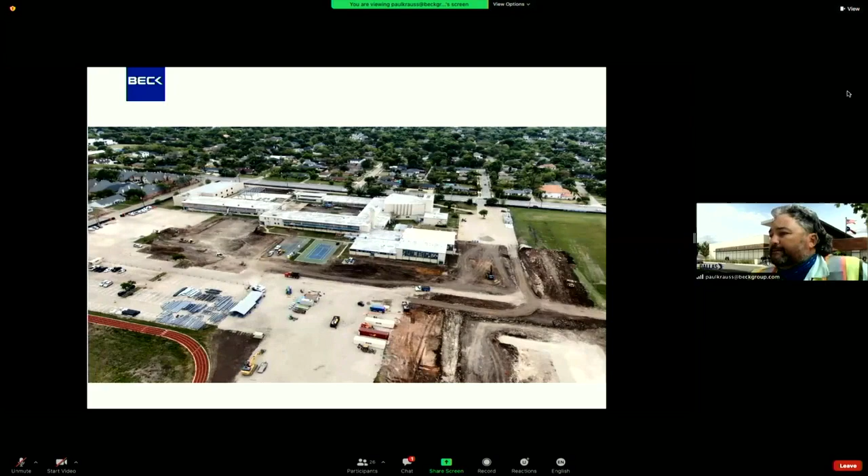We will be utilizing the existing parking lot. Right now we have some steel sitting in it from the previous construction before the tornado hit, but we'll be using that parking lot as an employee lot for all the workers on the job site to try to keep them from parking in the neighboring streets.

In the middle of the screen now, you'll see there's two yellow pieces of equipment. That's where the new cafeteria and student dining area is going. We're currently getting that pad prepped and ready to go.

In the middle of the screen you see there's a bare concrete pad with a little bit of steel. That was some of the construction started before the tornado, so we'll be picking up there in the coming months to continue and get that finished.

In the middle there, in between the courtyard area, that's the new library that will be going in. That pad's ready to go.

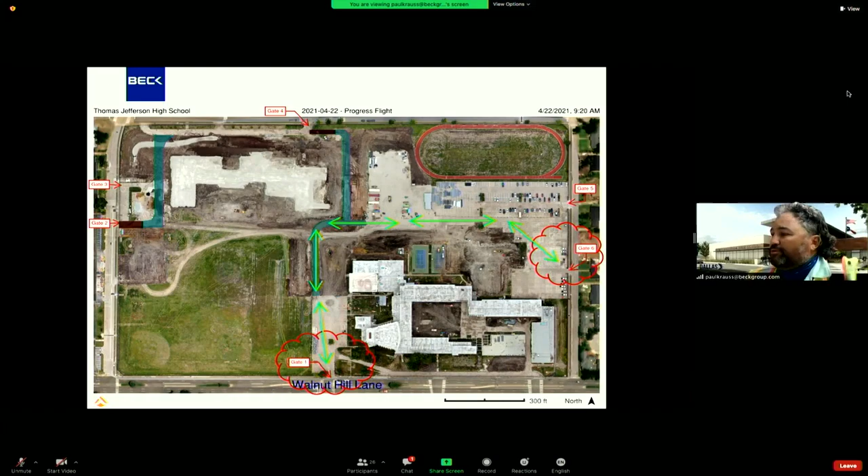I know this isn't ideal, but we're looking to utilize gate 1 and gate 6. Gate 1 is on Walnut Hill Lane and gate 6 is on Gooding Drive for right now. Some of the reasons why we need to use that routing for our trucks and deliveries is because we have a big detention system going in, which is going to go underneath the soccer field that will eventually be installed over by gate 2.

We also have a bunch of utilities that need to go in around the site. Until we get the majority of these utilities in, we have a temp road phase 2 that will be going in. Once we get all our utilities in, we will be looking to change over and utilize gate 1 and gate 2, which would be on Hedgeway.

So then traffic would slow a little bit on Gooding. Now I can't promise you that we won't be driving on all 4 streets around the neighborhood. At times we will need to use gate 3 and gate 4, but we will be trying to limit the use on those. They won't be open every day.

It'll depend on if we have a concrete pour or a different delivery, or if we need to shut down another gate. But primarily we are looking to use gate 1 and 6, I would say, till the end of this year. Then for next year, we should be able to use gate 1 and gate 2 as we continue construction.

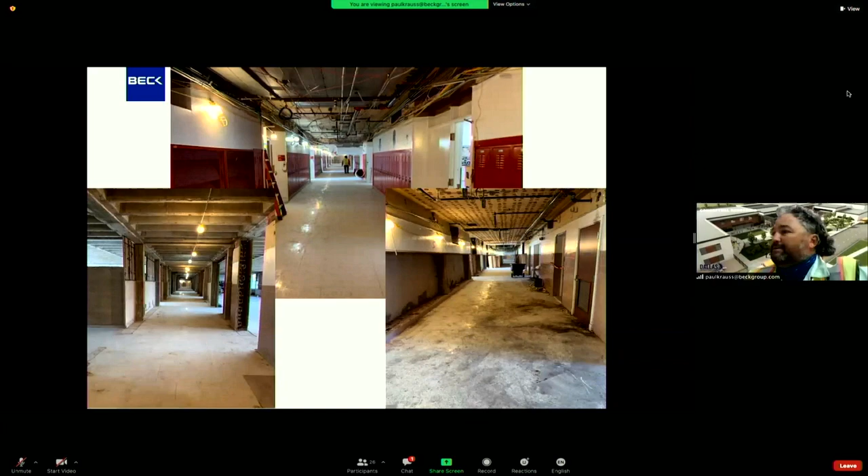Here's a quick look at what we've been working on inside the building. So demo, this is on level 2 of the existing building. We've been going through, removing the lockers, ceilings, and floorings coming out. Here's some of the old classrooms. A few of the walls are getting demolished.

On the outside, all the windows are coming out. So we've been working on removing the windows and installing temporary windows on the existing building.

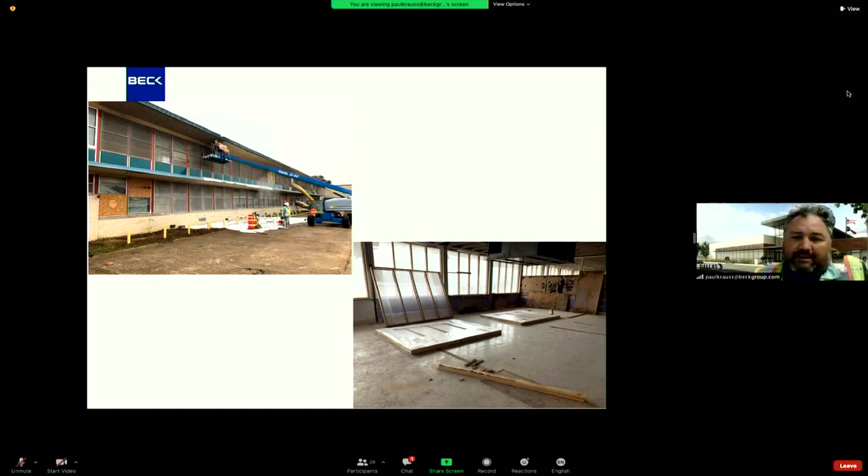I'll talk quickly about some of the upcoming schedule work we have. Over the next couple months, we're looking at finishing up our public work on Hedgeway, Killian, and Gooding Drives. We're hoping by the end of June, but that's depending on the city inspections and schedule.

We had a little bit of a wait trying to get the valve crew out. For those of you affected by the water, thank you for your patience there. We'll be at the city's mercy depending on whether we can finish by the end of June. We plan on starting work on Walnut Hill late end of May, and we're still hoping to finish that by the end of June as well. So hopefully for summer, there won't be too many disruptions on the streets outside of the job site.

On Walnut Hill International Leadership Academy, over the next couple months we'll be working on foundations, so drilling piers and installing grade beams to get the building up out of the ground. That will require concrete trucks every day, pretty much unless we get a little bit of rain, which hopefully we don't.

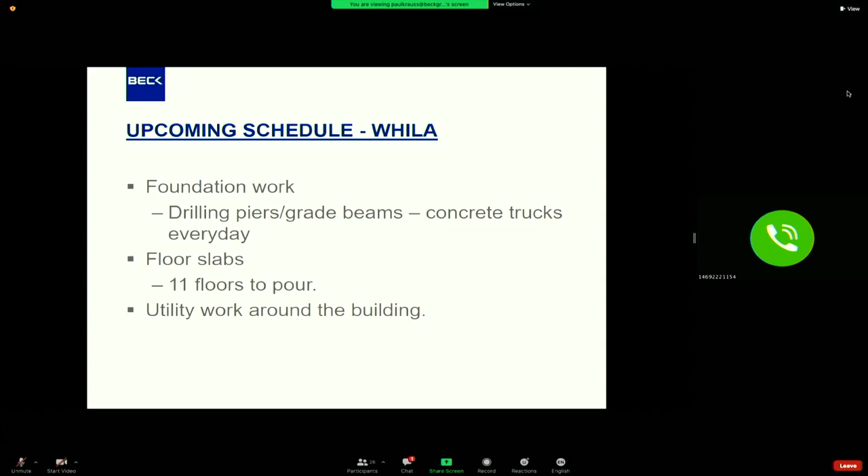We'll also have some floor slabs coming up. We have 11 floor pours to fit in. That'll most likely be towards the middle to end of summer when we start the floor slab work. And then of course we'll be working on the utility work around the buildings, which will be storm drain, sanitary, water, and electric lines.

Upcoming work around TJ High School, foundation work there too. That'll be drilling piers, grade beams, and again concrete trucks pretty much every day. We have some floor slabs to pour there, 12 of those to pour. So that would be, again, middle to late summer when we'll be starting that.

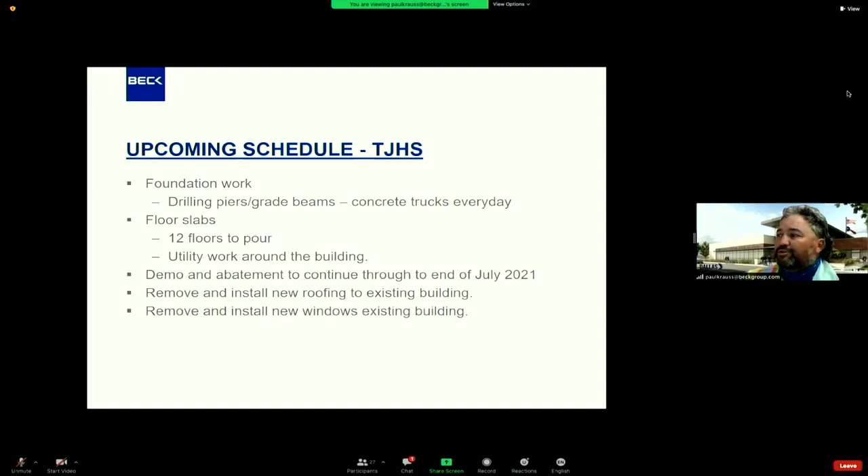We're going to continue on with demo and abatement of the existing structure. We're hoping by the end of July most of the interior is done. We'll have some work on the roof abatement, and we'll be starting to install the new roofing on the existing building, as well as installing some new windows. So that's kind of the activity you'll see over the next couple months.

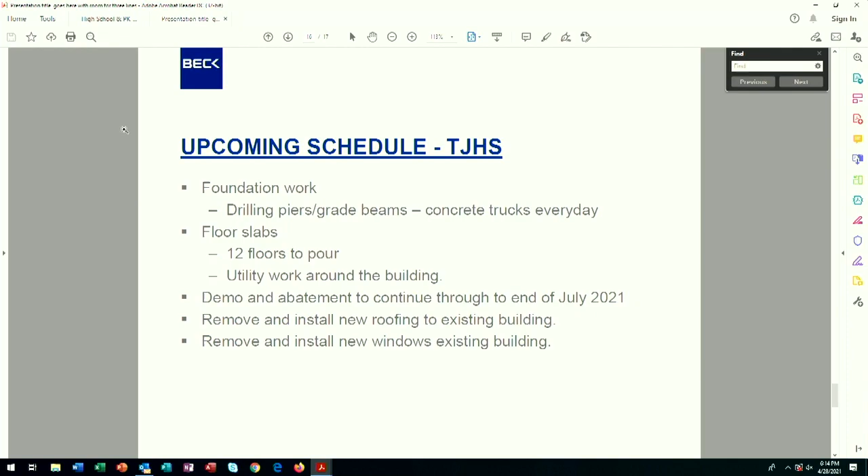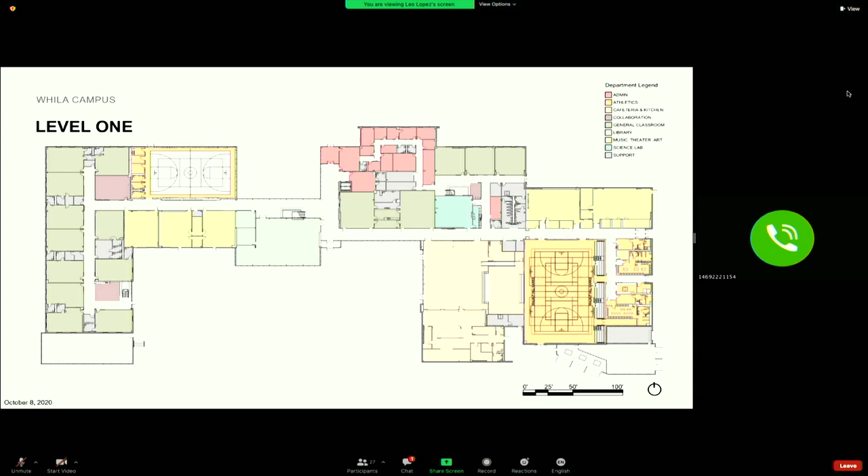Towards the middle, we have our practice gym, which also serves as our storm shelter, and just below that, our art rooms. In the middle of the building, on the south end, in light green, is the library. As you go further east, we have our administrative and business areas and some science labs, special ed. Towards the east end of the screen, we have our competition gym and locker area, and our performing arts as well, which contains dance, theater, band, choir.

One thing that's changed slightly since the last time you might have seen this is that we now have an opening between our competition gym and our cafeteria, so you can have large presentations, serving it as the cafeteria or the gym.

The second floor is very similar. The west side serves elementary students, and as you go further east, you have your science labs, and at the east end, you've got your middle school.

So once again, this school is unique in that it's not just a pre-K school, it's not just an elementary school, it's not just a middle school—it's all of those. So technically, your children could go from pre-K all the way through 12th grade without ever leaving this campus, because they would just move on to Thomas Jefferson.

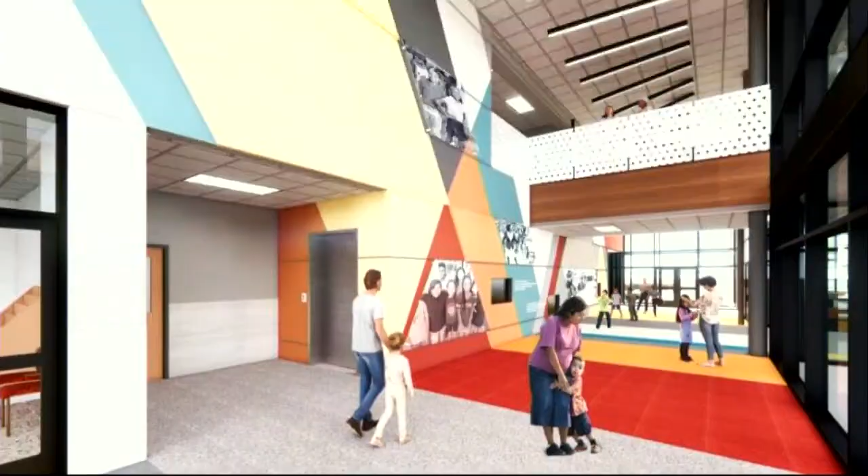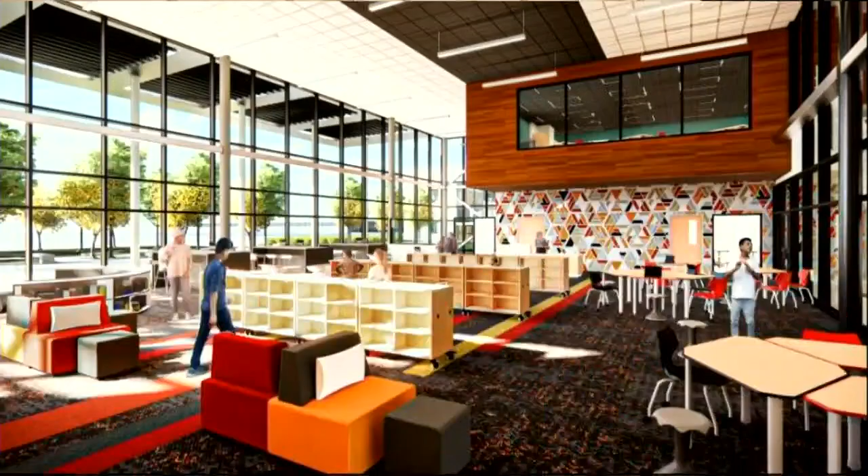Here are some renderings of the school. This is at the main lobby entrance—it's very colorful, very vivid color scheme, very contemporary as well. And here's also a few shots of the library, incorporating some soft wood tones and lots of natural light.

Now we move on to the Thomas Jefferson High School project. That one serves 9th through 12th grade, with roughly 2,200 students and 200 faculty. There's roughly 170,000 square feet of existing building that we're able to keep—again, much of it was demolished in the tornado—and we're adding roughly 150,000 square feet of new addition, for a total of 320,000 square feet.

It's divided into different regions. On the bottom left, we have our fine arts, which is the existing auditorium that we're able to keep, and also your band, modern band, and dance just above that—that's the new addition, sort of hatched in transparent mode. As you go north to the orange area, that's where the old gym used to be, which is now like a wrestling area, and then the new athletics is up at the top of the screen.

That large box at the very top is our main competition gym, which also serves as our storm shelter, and to the left of that is our lockers. As you go east, you'll see our new dining area, which includes not only a kitchen but a culinary center for students to learn culinary skills. We also have CTE, JROTC, and the existing building is pretty much the same.

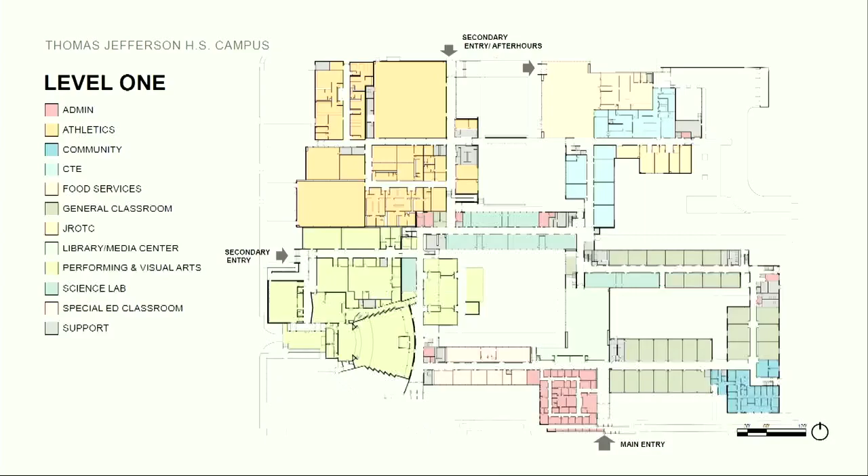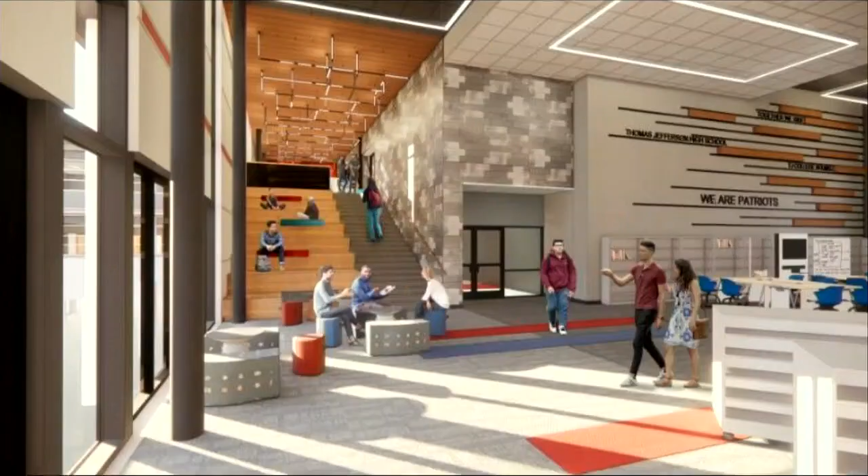I believe this is the library. You'll notice we have a learning stair. We're incorporating a lot of collaborative spaces and 21st century learning in this school, so it's not going to be just your typical old-fashioned classrooms. We're thinking outside the box on this one.

I think that might be the last slide, actually. I'll turn it back over to Joe.

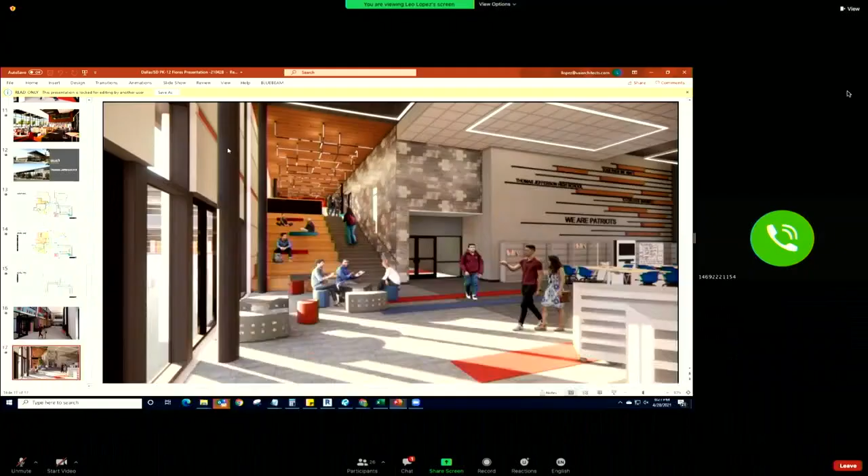All right, thank you, Leo. Can you go back to the overall site plan, please? Sure, no problem.

And one of the people joining us is Mark Colby. He is our landscape architect from Pacheco Koch. Mark, if you want to give us a brief update on the landscaping we're looking at implementing at this site, please. Sure. Hello everybody. As Joe said, my name is Mark Colby, and I'm the senior landscape architect on the project.

We might as well start with the existing site and the existing vegetation out there. We do have to take down some existing trees. Some were damaged in a tornado, and we had a certified arborist come out from our office and take a look at them. He recommended they be removed because they were very close to the south side of Thomas Jefferson High School along the entrance off Walnut Hill, and thought they would probably eventually fail and become a safety hazard. So some of those were removed.

We had to take other trees out that were in conflict with new construction. We did preserve some trees along the face of Thomas Jefferson along Walnut Hill. We also preserved some existing trees along Gooding Drive and Killian Drive. We're also adding approximately 188 new trees back to the site, so we're more than mitigating for the trees we've taken out.

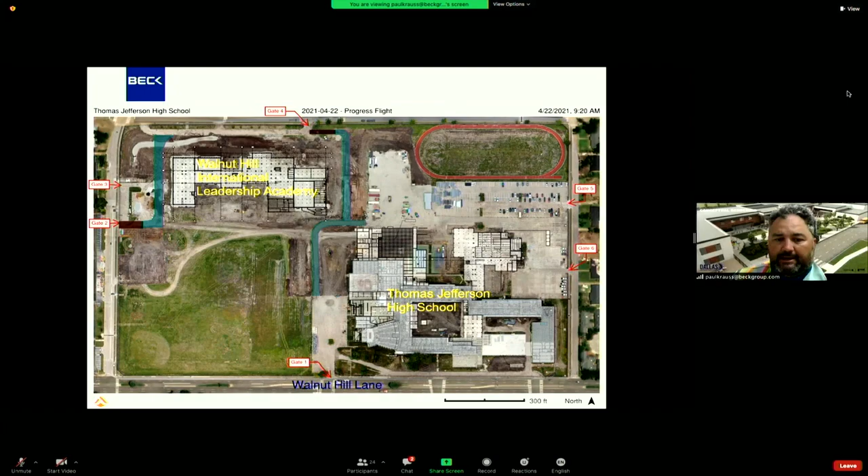And I have a quick drone video to show you. I said before I wouldn't talk all over it, and I won't on this one. I'll just let everyone take this in and point out a few spots as we move around the job.

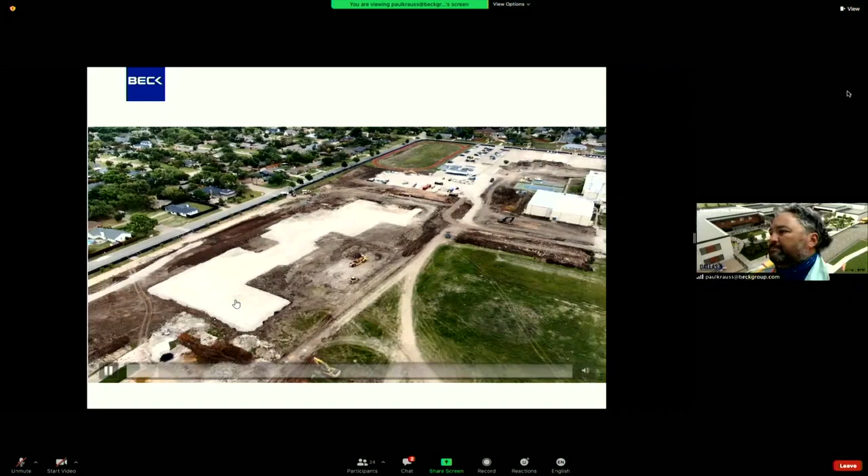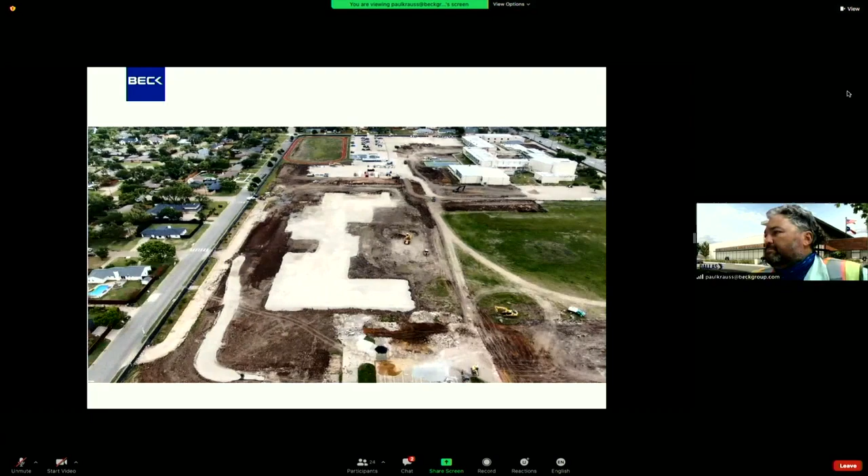So in the middle of the screen is the footprint of the building for the Walnut Hill International Leadership Academy. We're ready to go, just waiting on that permit so we can start drilling piers and get our foundation work going.

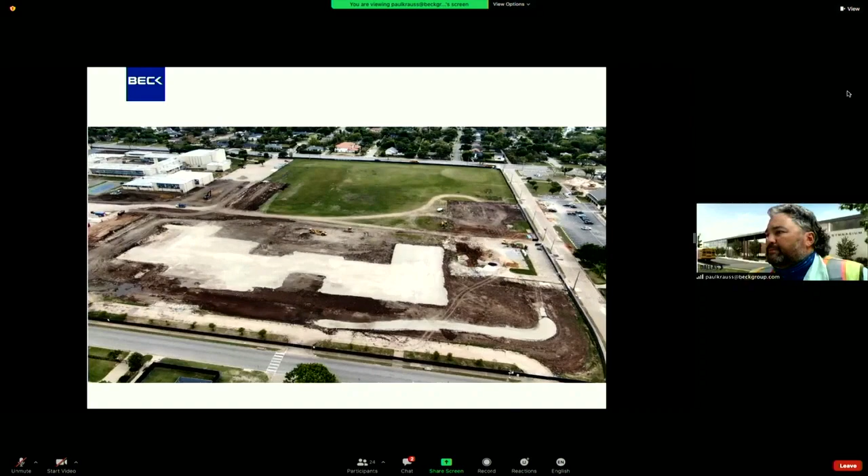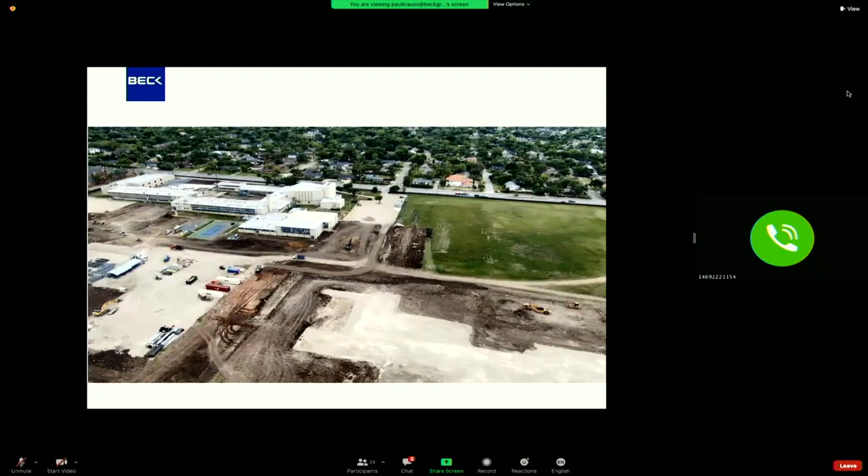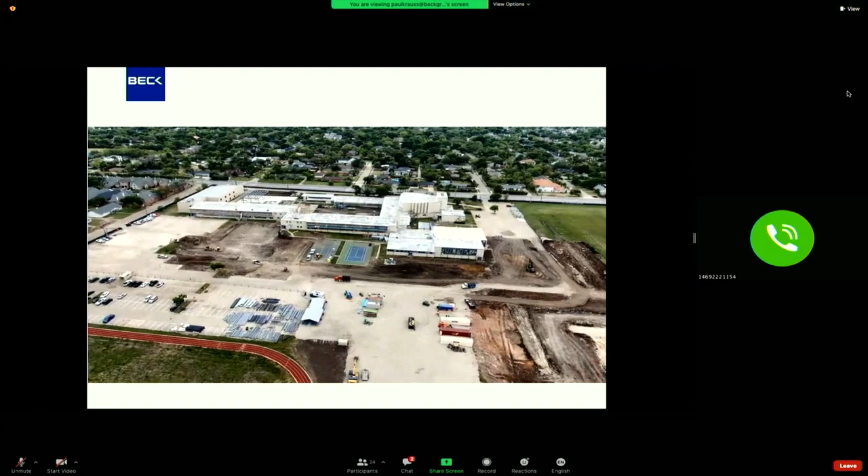There was a question about the detention pond, just to define what it is. Essentially it's basically to collect rainwater and disperse it at a slower pace so that we don't have runoff, and that's what's incorporated into the new design. Actually it's not a detention pond, it's a detention system - isn't that correct, Paul? Where it's underneath the ground, you don't even see it. Correct, yes, it'll be buried and the soccer field will end up over top of it so you won't even know it's there. It's basically a whole lot of pipes underground that will help disperse the rainwater slowly into the city storm.

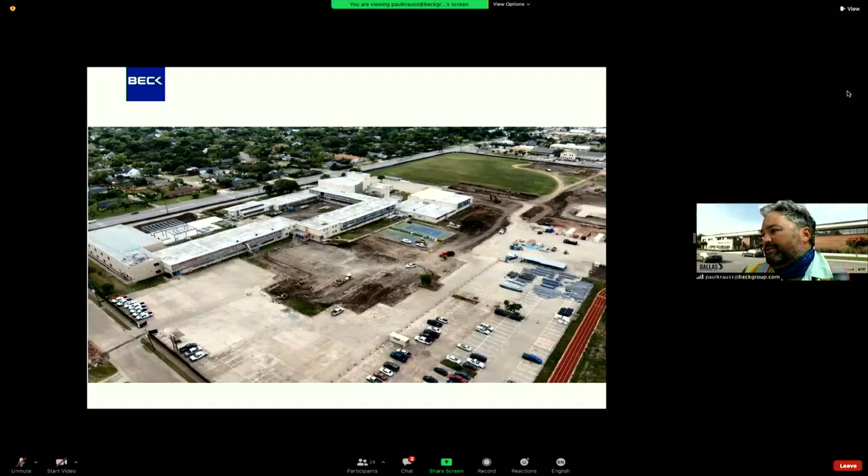So in the middle of the screen, where the two yellow pieces of equipment are, that's where the new cafeteria and student dining is. We're working right now to get that pad ready to go so we can get the foundation work started there in the coming weeks.

So in the middle of the two courtyards, there's the lighter gray or brown-ish color - that's where the new library is going. And then we'll be picking up where the additions had to stop because of the tornado back in 2019, so we'll be picking up and completing that work as well.

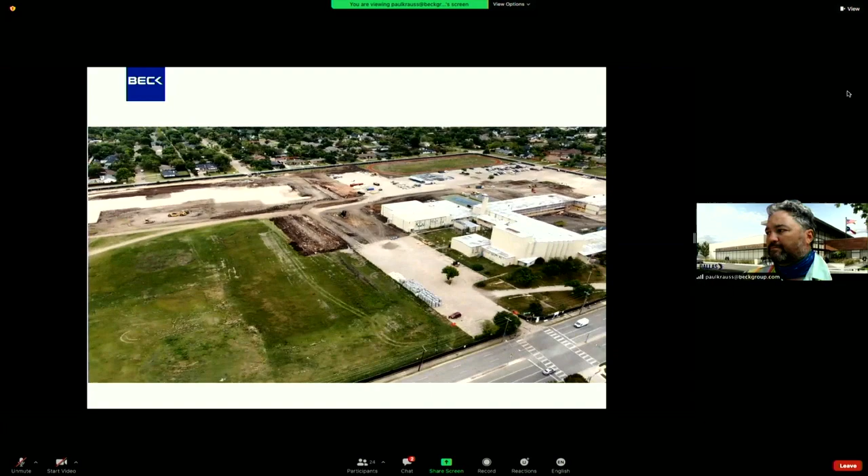I think this is a pretty cool video, just a quick overview. This was shot last Wednesday.

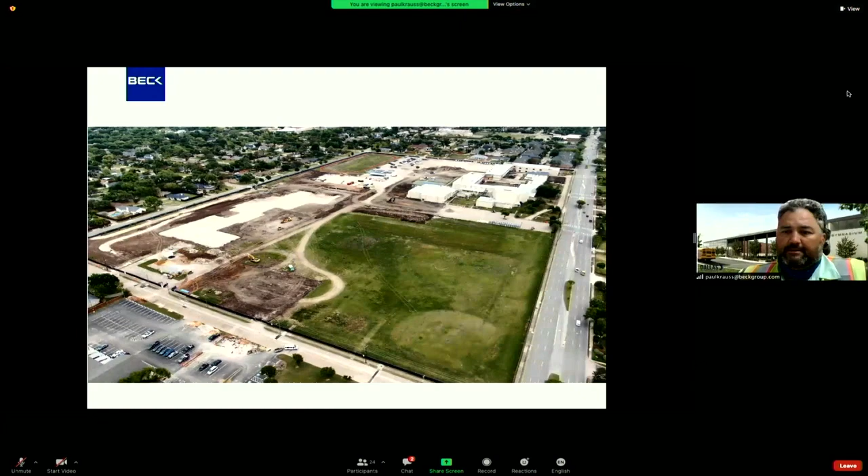So here's a quick overview of how we are setting up our sites. And I think I said before that it's not ideal for the neighborhood that we will be using Gooding Drive, but I'll work through some reasons here over the next couple of slides as to why we need to set the job up this way. So we will primarily be utilizing Gate 1 off of Walnut Hill Lane.

And circling traffic out Gate 6, or we'll be coming in Gate 6 and out Gate 1. From time to time we will be opening up Gate 2, 3, or 4, depending on what we have and what other entrances may be closed, depending on if there's work there.

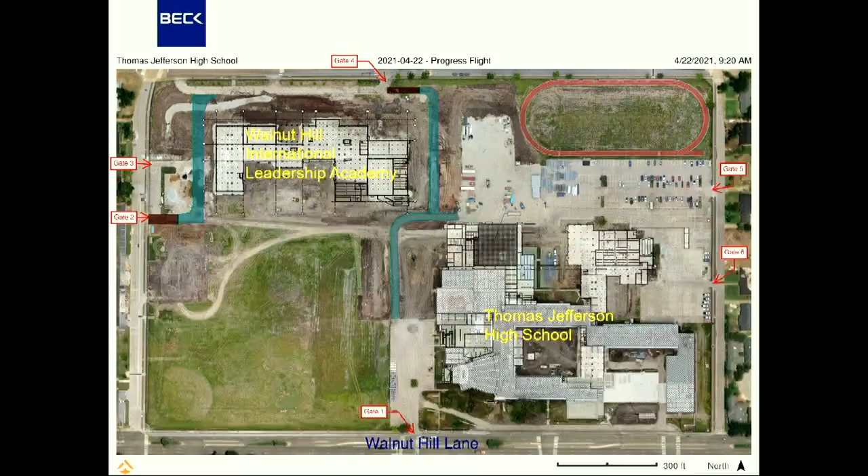A couple of the reasons why we need to use those gates right now is there's the footprint of the detention system, which is a rather large excavation, and it's fairly deep - it's almost 20 feet deep. So by the time we lay that back, it's a very big hole in the ground. Plus we have a lot of utilities that also need to go in around the site.

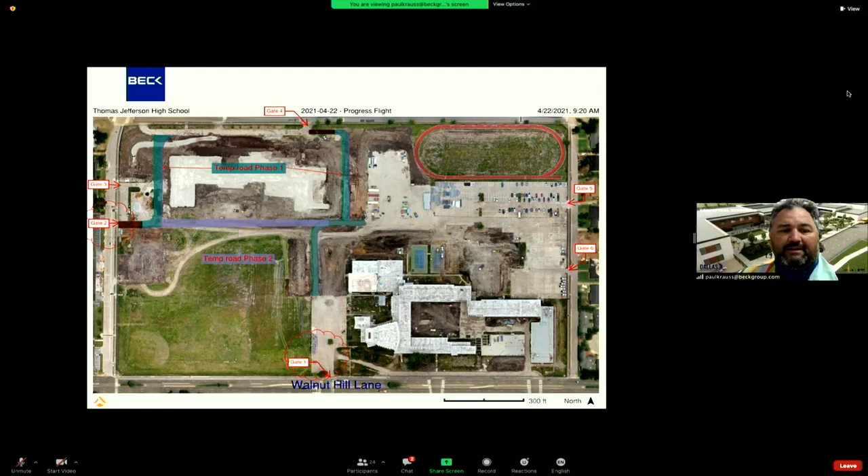So until we get these utilities in, which we are hoping by the end of the year, we would install a second temporary road, which is our phase 2 road. And that would open up Gate 2 for us to be able to come in Gate 1 and out Gate 2, or in Gate 2 and out of Gate 1, which would mean we would limit our traffic on Gooding Drive - we would then only use that as necessary.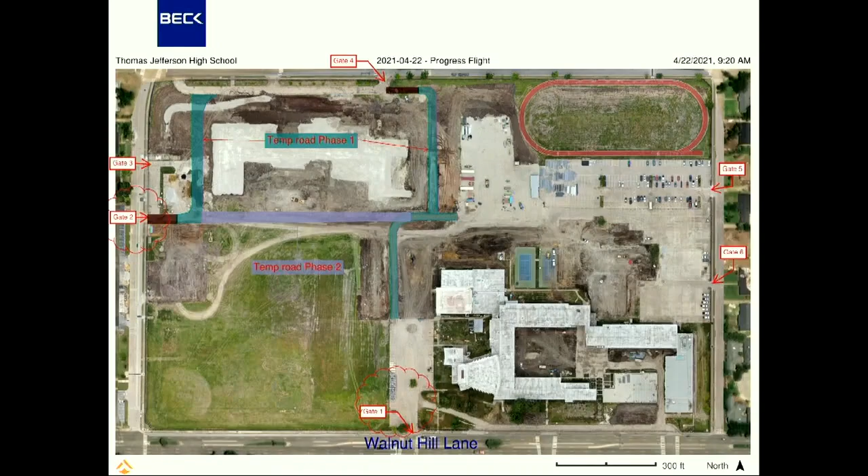Here's a quick look at some of the demolition work that we are doing inside the building. This is on level 2 of the existing building.

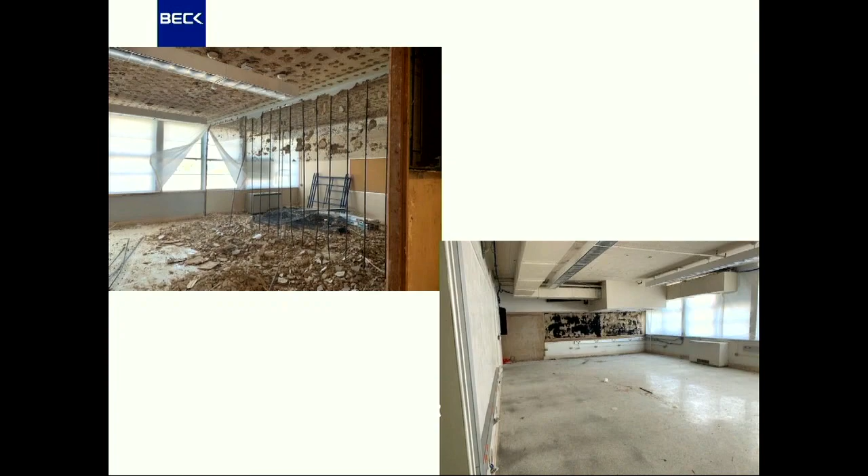Here's some of the classrooms that we've been working through, doing some demolition. On the exterior, we've been removing windows and also installing some temporary windows.

I'll talk briefly about some upcoming schedule work. The public work we're working on right now includes Hedgeway, Killion, and Gooding drives, and we're hoping to finish that up by the end of June this year. We're also looking to start work on Walnut Hill Lane by the end of May, and we want to wrap that up by the end of June too.

But it is pending the city inspections and schedule. Those affected by the water shut off, I know that was delayed a little bit, but that was all in the city's hands. So again, us finishing by the end of June will be dependent upon the city helping us out and getting the inspections complete.

Upcoming work on Walnut Hill International Leadership Academy. Once we get this permit, we'll be going to town on drilling piers and grade beams and getting the building coming up out of the ground. It will mean we'll have concrete trucks every day to pour the piers and the foundations. After that, we'll have some floor slabs. We have 11 pours, or 11 sections of floors, that we need to pour for that building, as well as we'll be installing utility work around the building, which is the storm drains, the sanitary lines, the electric, and the water lines.

The same will be happening on TJ, so foundation work, drilling piers, getting concrete trucks every day, floor slabs. We have 12 pours over at TJ. Utility work will also be going on. We'll also be on the existing building working on demo and abatement. That should be working through the end of July for the interior.

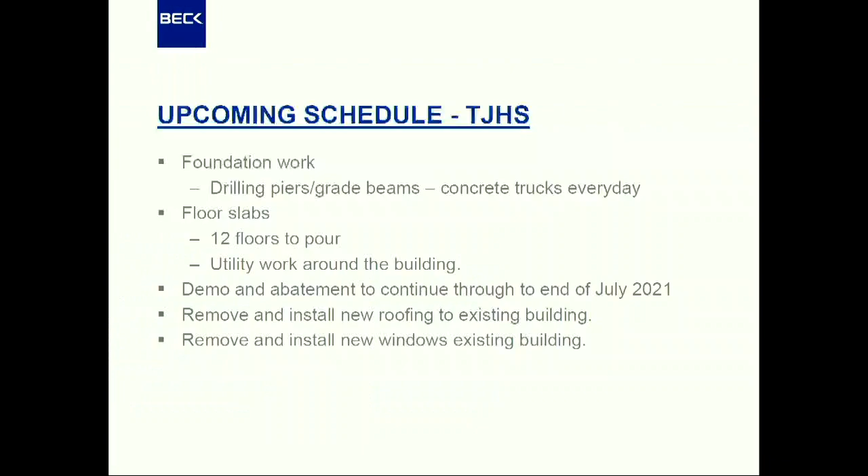Lastly, we want to reiterate what Trustee Flores spoke about earlier. We want to be good neighbors too. We know construction is messy and it's noisy. We want to clean up after ourselves. We have meetings weekly where we talk to all our contractors and reiterate not to drive through the neighborhood. We really don't want delivery trucks going through the neighborhood. We send out logistics plans like we showed you earlier and ask these deliveries to come in gate 1 or out gate 6. But we can't control everybody, so I can't guarantee there won't be a rogue truck that drives through the neighborhood. But we do talk about it weekly with everyone, not just about driving through the neighborhood, but about being good neighbors.

So thank you for having me, and I look forward to sharing some progress with you guys in another couple months.

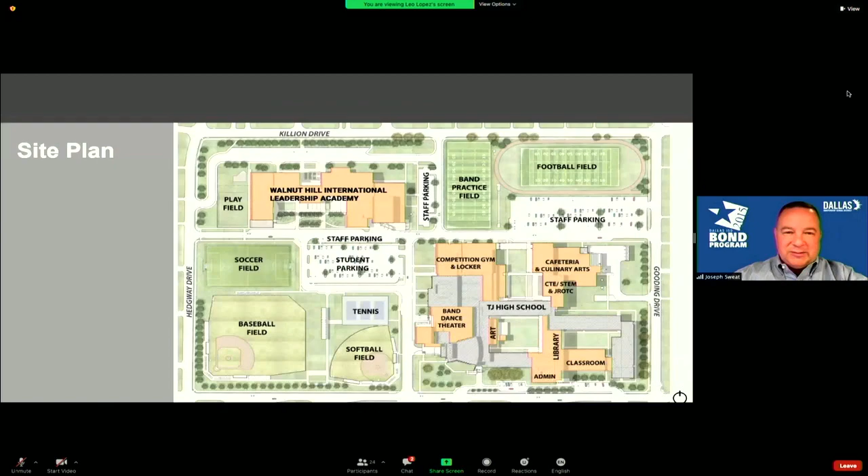Thank you, Paul. Paul failed to mention one of the things they have done while doing utility work out there on Hedgeway and Killion, working around the site, is his team has gone and talked with the neighbors that have been impacted and coordinated with them, or if the house is under construction, coordinated with the contractors there to make sure everything's good, and to be a good neighbor and make sure those people impacted by our utility work are up to date with all the information they need, and we keep them abreast of anything that's happening.

All right, well, I'll go on to the next part. My name is Leo Lopez with VAI. I'm the Senior Project Architect on the Walnut Hill International Leadership Academy, formerly known as Dallas ISD PK8. It serves pre-K through 8th grade.

In the top rendering, you can see the parent drop-off, which is on the north side of the campus. And on the south side of the campus, we have the bus drop-off. You can see there's a lot of enhanced landscaping features. It's a very, very playful, interactive space. And we're also incorporating trellises, just for nice outdoor learning areas.

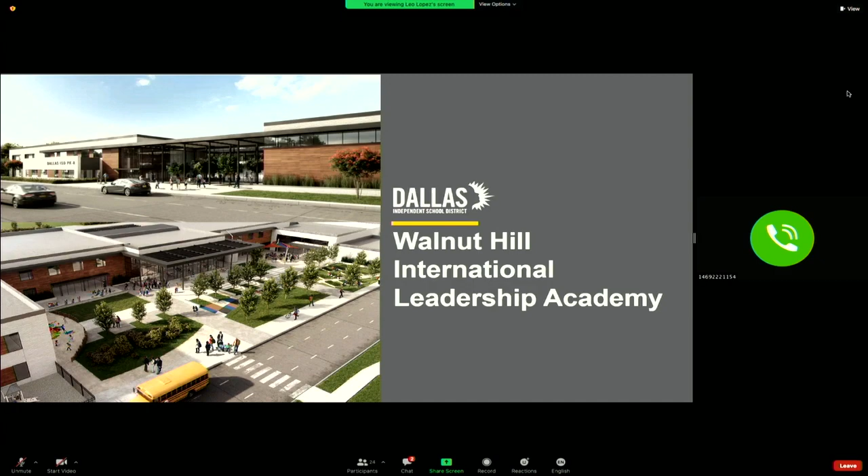The way the school is broken up, we basically have pre-K through elementary typically on the west side of the building, and older students on the east side of the building. More specifically, level 1 west side is pre-K through 1st grade in the dark green color. As you move further east, you see the practice gym, which also serves as the school storm shelter. Just south of that, you see the art rooms. In the middle of the building is the library. There's a lot of natural light coming through that. It's surrounded by glass on all sides.

And then the pink area, the top middle, is the administrative area, the main entrance, the offices, and so forth. Just south of that, we have special ed, followed by a middle school science lab, the 6th grade classrooms. And then the east side of the building is primarily performing arts and athletics.

So the two light green areas at the top northeast corner are band hall, dance, theater, choir, some of them spaces combined. Just south of that, we have a competition gym. And just west of that is our dining area, the cafeteria.

For those of you who might have attended last time, you'll notice some steps showing up on that stage on both sides. That's because now we're going to open up the stage to either side, so you can give smaller presentations in the cafeteria and larger presentations or plays, things like that, to the gym.

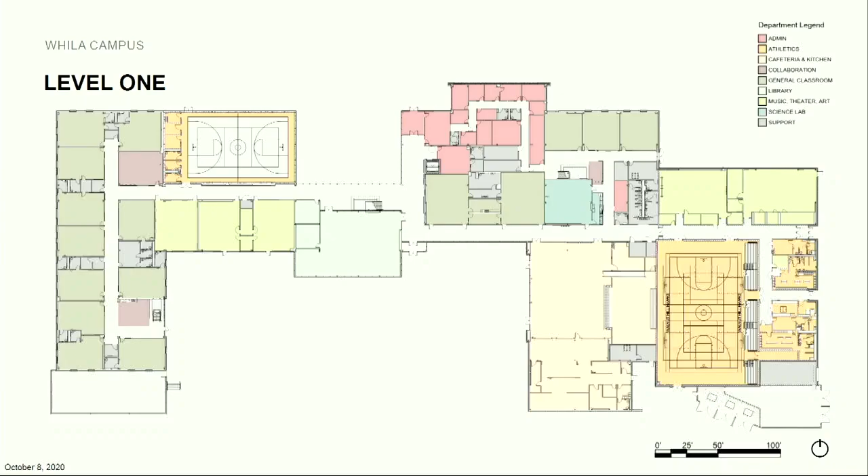On the second floor, it's still a carryover from the first floor. The second floor west is primarily the rest of your elementary school, so second grade through fifth grade, followed by additional art classrooms and science. In the middle of the building is primarily your sixth, seventh, and eighth grade classrooms.

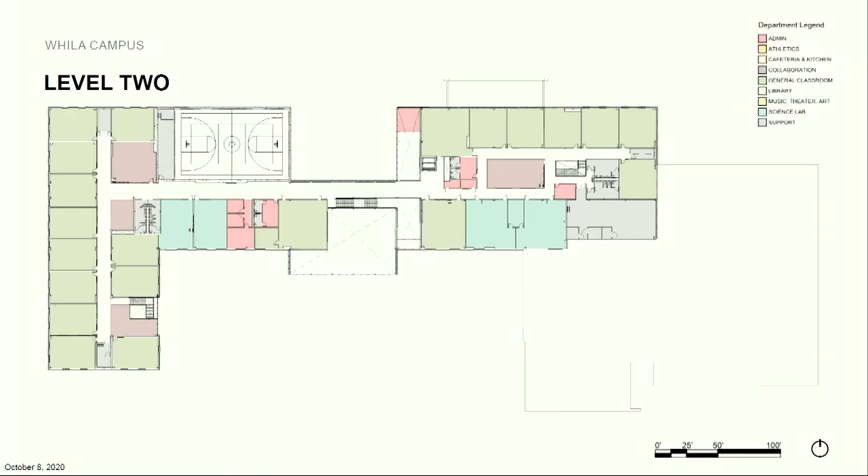So this school serves 2,200 students, with 200 faculty. Half of the school was demolished in the tornado. Well, some of it had to be demolished because it wasn't salvageable.

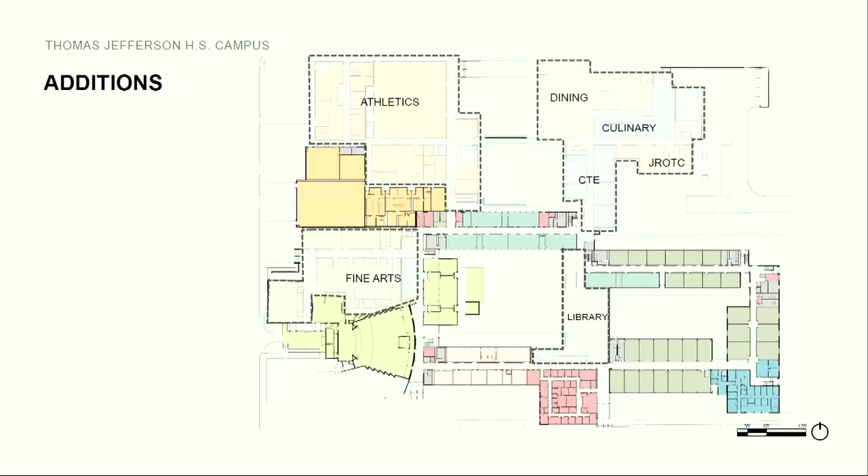All right, now this is the second floor, which is mostly a carryover of the first. Much of the renovation takes place, much of the entire school's population takes place on the first floor. The second floor is primarily what was formerly existing. We just kept it as it was generally.

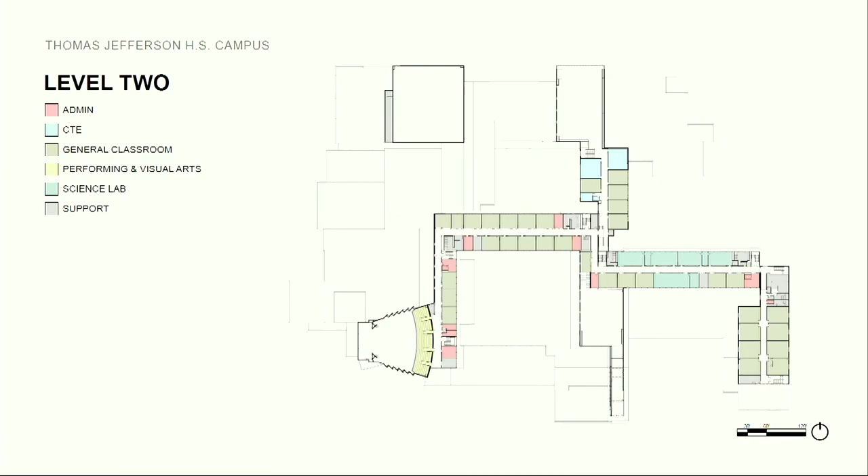I think that's all the slides that are on here. I'll go back to the site plan.

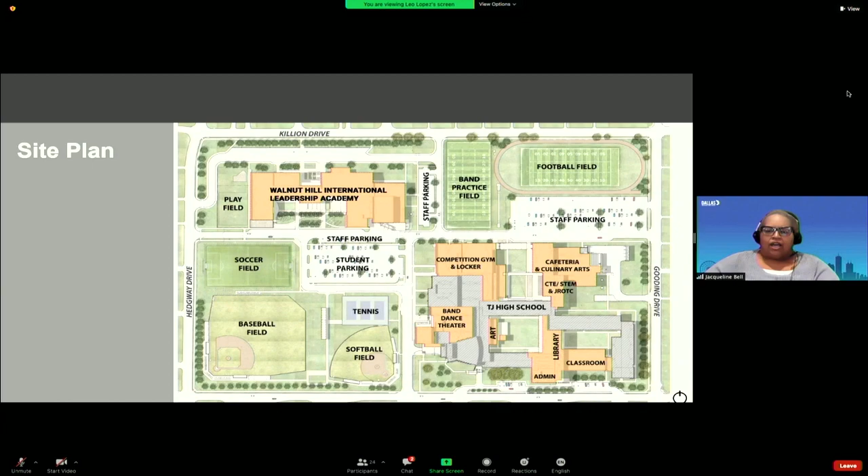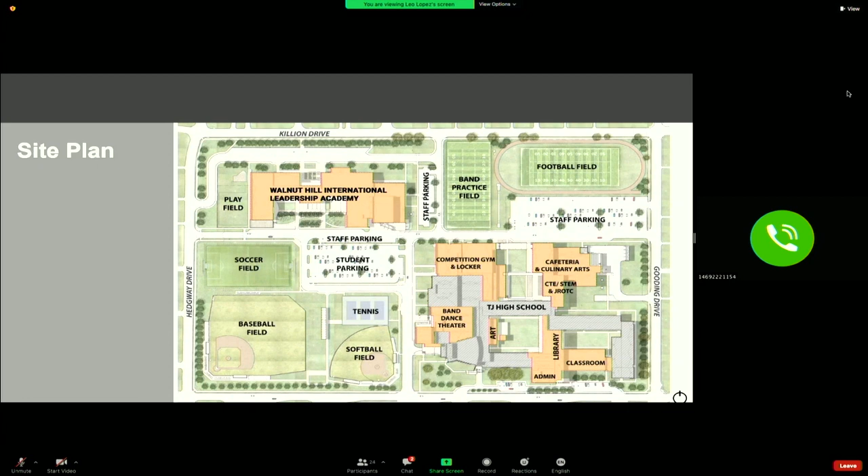Sure, I can cover that. So basically on the screen you see here, on the upper left is the Walnut Hill International Leadership Academy, and it almost replaces one for one the exact footprint of the old Cary Middle School. And the TJ High School remains exactly as it was, it just expands out a little bit to the north. And the two schools almost touch each other by almost 100 yards or so. That's basically how it's laid out.

Walnut Hill International Leadership Academy is primarily entered through Killion Drive. The parent drop-off is at the far north, bus drop-off is down south. And when you're looking at TJ High School, it's kind of the inverse, the bus drop-off is on the north. So basically that lane running east and west is your bus drop-off for both schools, and your parent drop-off is at the south end by Walnut Hill, the main entrance.

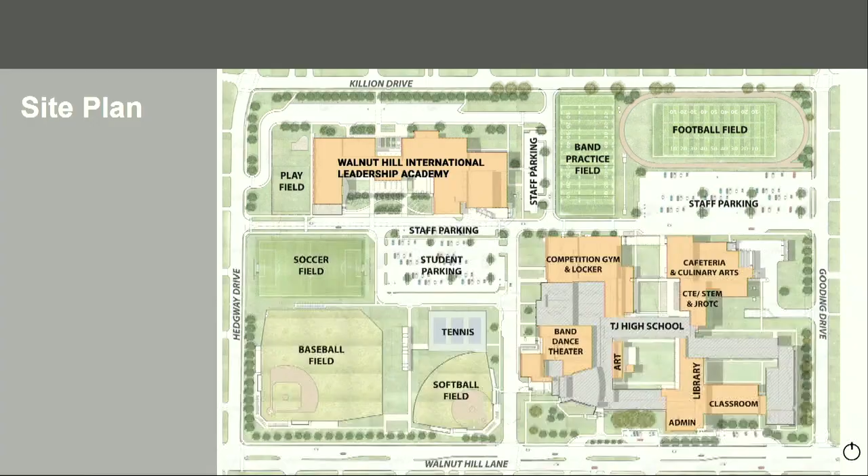Leo, go to the cover page. Yeah sure, just to follow up a little bit on what Leo mentioned, basically Principal Potter's old home on Midway and Killion will be moving to the new Walnut Hill International Leadership Academy, and all his staff will be there. And then the old Walnut Hill Elementary is being turned into a Career Institute North. So completely different functions now for those campuses.